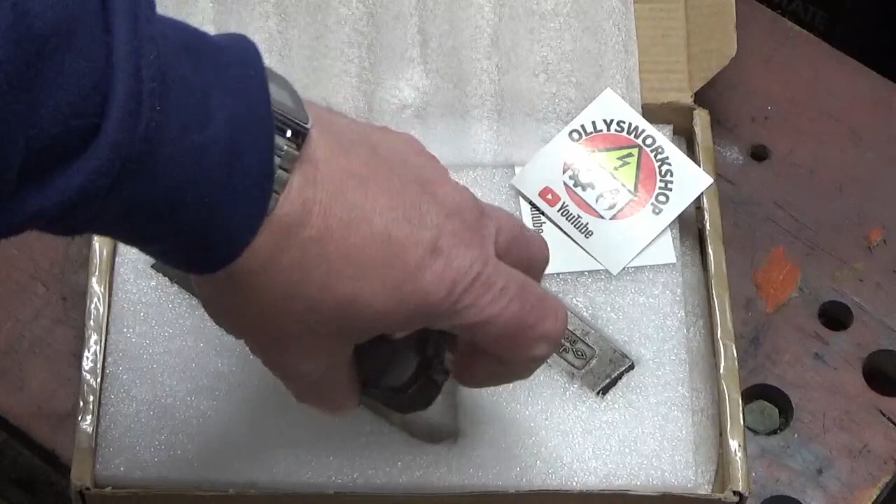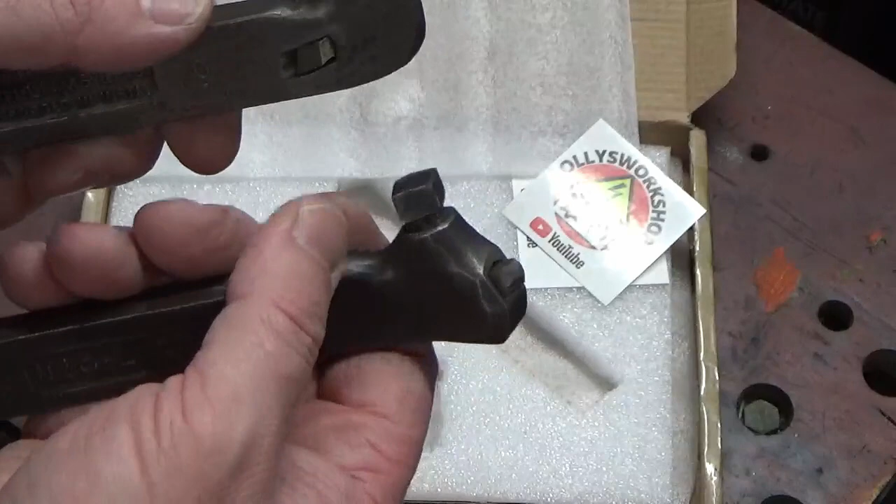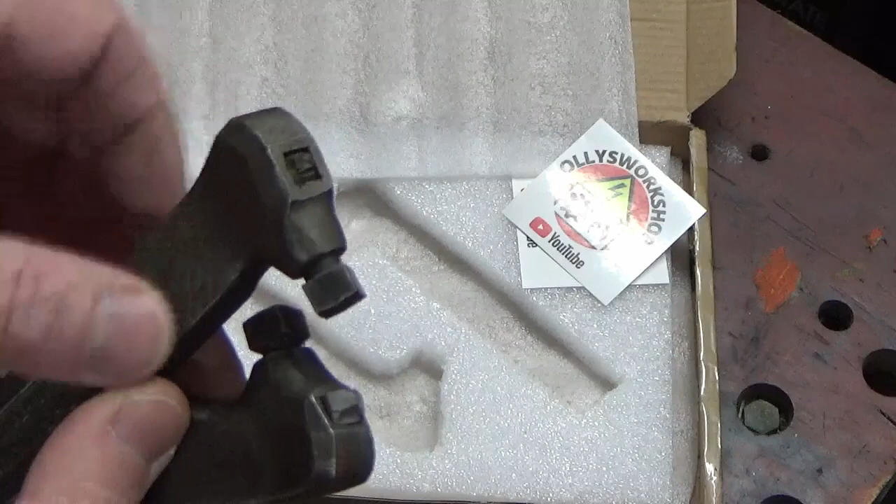Olly has sent me, based on the work that I'm doing with my shaper, he got in touch with me and said, look, I've got a couple of old turning tools, shaping tools, a left hand and a right hand, would I like them for the shaper? Because Olly said he's not going to do anything with them. So I said, well, yes please, they would be very handy. These are the kind of tools that you load a bit of high-speed steel into, and they're cranked, which is ideal for the shaper for getting into corners and things like that.

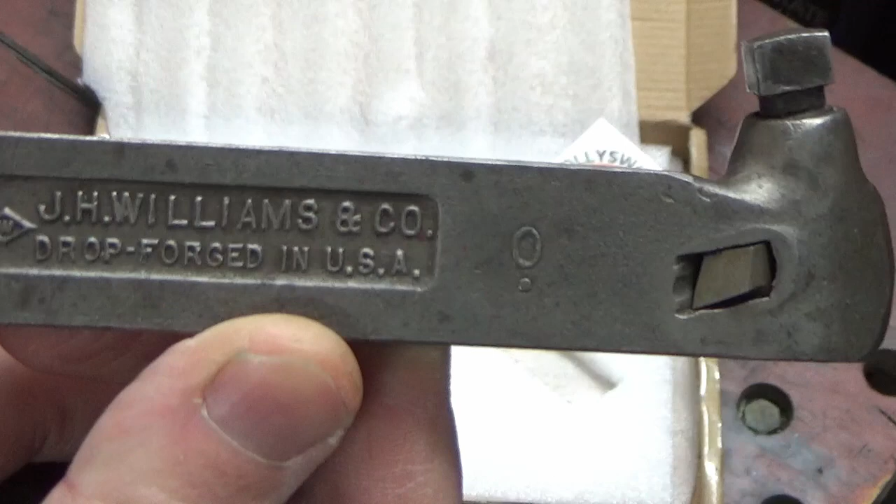So one is, oh dear, a Williams turning tool holder, J.H. Williams and Co, drop forged in the USA. And the other one is also a USA made tool, which is an Armstrong, Chicago, USA. So both good quality items.

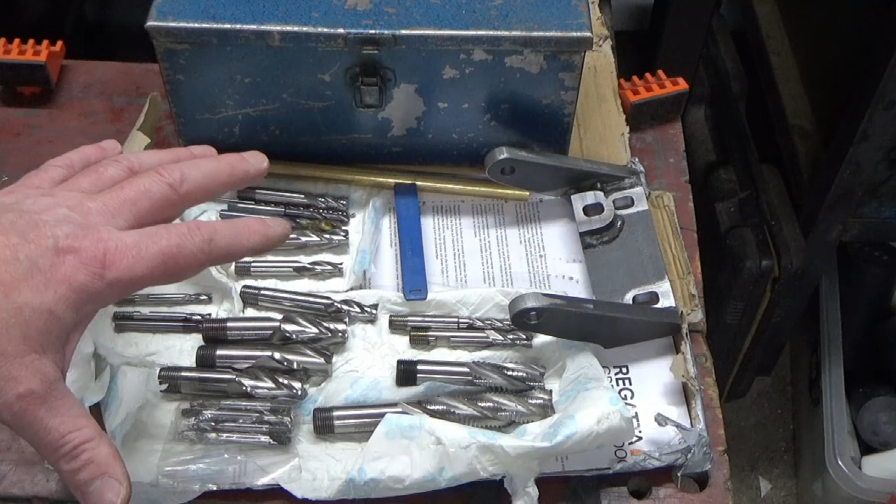There's two separate, very generous subscriber donations here to the channel, which is massively humbling, and there's some really generous people out there. So this lot at the front here is from Terry Bloomfield, one of my long-time subscribers, and I often swap mails with Terry. Doesn't live too far from me, and Terry and I have been keeping our eye on the local auction site that go in when companies go bust, and Terry's obviously got a lot more time in the week than I've got, and he's made some good scores.

This is the product of one of those scores, and he's got loads of end mills, slot drills, that kind of thing through some of the auctions. He's got some good bids and got some good scores. And he said, do you want me to send you a few? I said, yeah, you're more than welcome to, Terry. And I've only literally just unwrapped these, Terry.

I've been keeping them for this, so been through and unwrapped them. There is some absolute belters in here, and these are all the Clarkson threaded shank, which I've never really had any of those. I've got to be honest, I've always gone plain shank, because that's the kind of end mills that I've had access to. So Terry sent me all these through. There's a mixture of rippers, long series, standard series, just high speed steel, end mills, and all very good, all in very, very good condition. Couple of carbide end mills. Yeah, just fantastic, Terry. Absolutely brilliant.

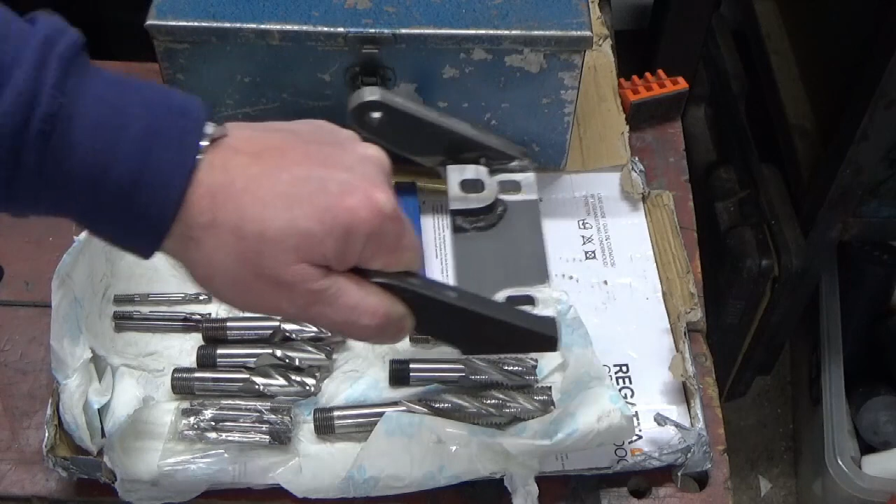And Terry also sent me the piece of 10mm plate that I made the bracket for the shaper out of, and a nice rod of brass that he chucked in as well. So Terry, thank you very much. That's much appreciated, and they will get put to good use.

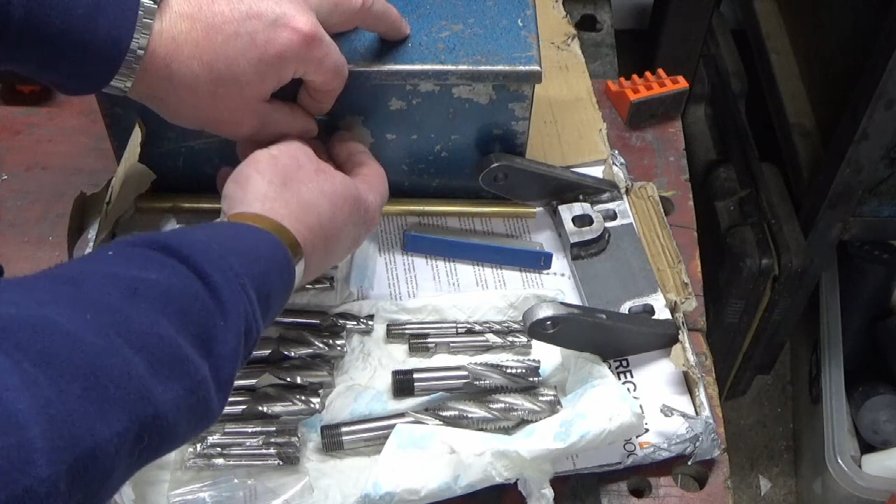Alright, so to anybody who understands the size of an Atlas 7B shaper and understands what a vise looks like, and is looking at this box, you'll probably now understand what I mean by, I think it might be just a tad on the big side.

So what I will say, I'm not going to do an unboxing, but I just want to show you this box. The guy I ordered this from on eBay said, look, it might take me a while to get this to you. I'm in the middle of moving workshops, but don't worry, stick with me. And I said, look, I'm not in any rush, so I'm fine with that.

I said, just do me one favour, can you please make sure you do a thorough job of boxing it up? It's quite an old vise in here, with quite thin sections in places, and I didn't want Captain Postman doing his usual trick of playing football with it. So I said to him, can you do a good job of boxing it up?

Well, you really cannot grumble at this. It's bolted down inside the box, and he's used three-quarter inch, 19mm, a mixture of chipboard, plywood and OSB board to make this box up. I couldn't be more pleased with the way that came packaged. Anyway, enough of that.

I'm going to get it out of the box. I'll get it on the bench and we can dig into it. It's not been out of the box yet at all, so I'm going to get it out of the box and on the bench.

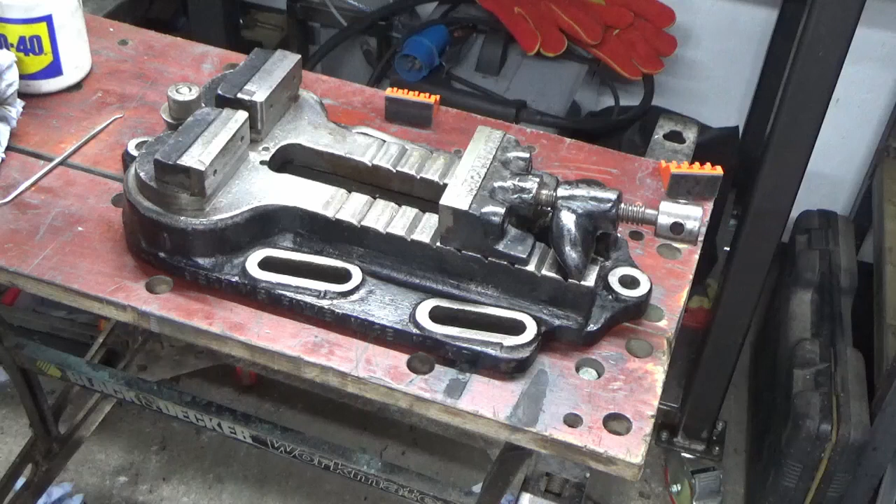So, what folly? Well, having looked at it out of the box, I think I probably should have done slightly more research. Anyhow, it's here and we bought it.

So what is it? Well, it's a Jerry's, I'll show you this in a minute, Jerry's Fixie Vise number X5. I think this is really quite old. It's got a...

Just over 6-inch, 160mm capacity at its broadest. Total width nearly 6.5 inches, 165mm that way. Overall length of the whole vise is 18 inches or 480mm from lug to lug, and overall width is 9 inches, 230mm. Overall height, which is one of the things that drew me to it, is 95mm or 3.5 inches. Now that's what I saw.

Well, amongst other things, it was that slenderness that attracted me to it, just because of the amount of room I've got on the shaper. So that was one thing that drew me to this, and the second thing is it's got these adjustable jaws where you back this off and you can wind these around and reset them to hold round stock. You slide your jaw up, slide your clamp up, and clamp up some round stock. And I thought, for a shaper, being a complete shaper newbie as I am, I thought that would be a really useful thing to have.

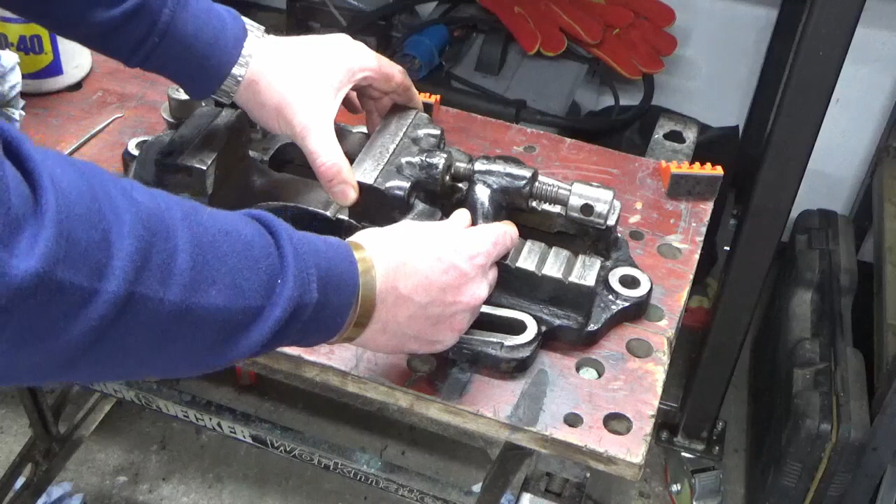The other thing I found that I'm not best pleased about, because the guy never mentioned it, as I was playing around with this - it's fairly obvious that the tip of the thread, the cone on the end, doesn't line up with the conical shape in the end of the jaw. When I looked at that, it's fairly obvious it's been cracked there and there, and the crack runs around here. It's been repaired. Somebody's re-drilled a very poor conical shape into the back of the jaw, and it's in the wrong position by the looks of it, albeit it looks fairly centered.

So yeah, you can see the crack. I don't know how it's been repaired, really don't know. So yeah, not best pleased about that - the guy never mentioned that at all in the sales pitch on eBay. Not the end of the world though. I'm sure we can do something with it, and we need to strip this whole thing down anyway to have a look at it. So, folly or not, I don't really know, if I'm honest, at this point.

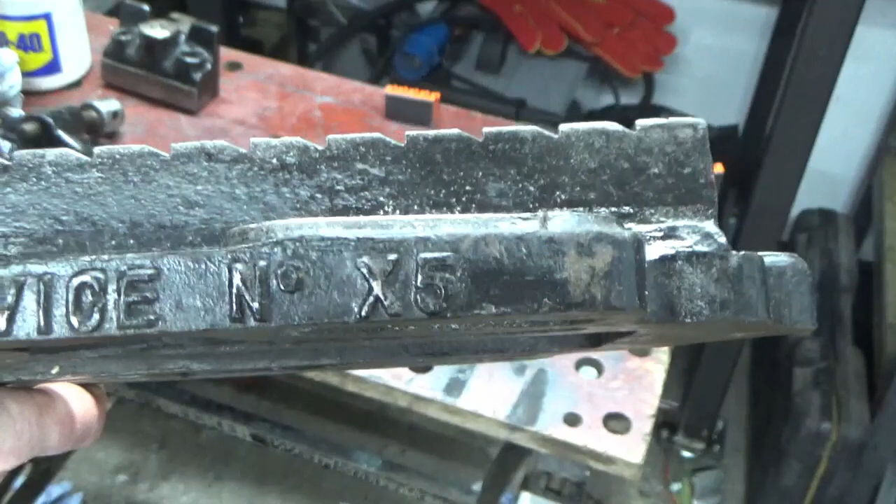I'll just lift it up. So there you go, Jerry's Fixie Vise number X5. And then on the underside you've got the mechanism

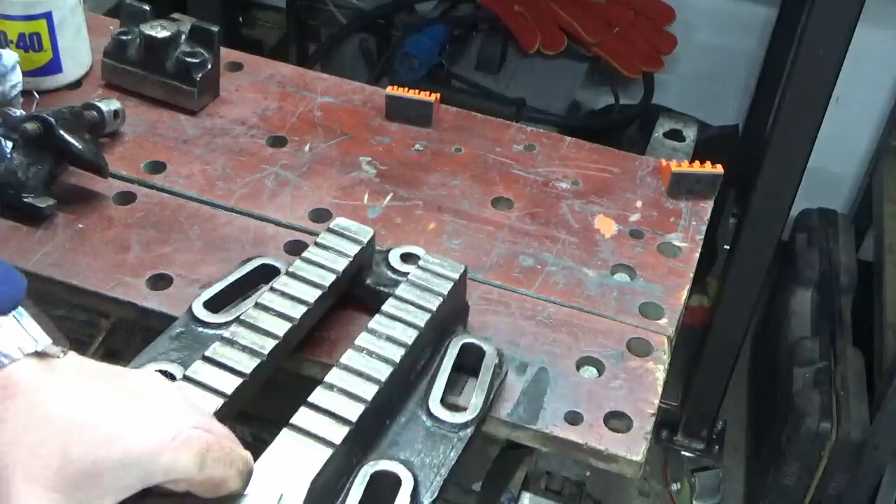for these moving jaws. This is a milling vise from the research I've done. In all my years of working on old manual milling machines, I'd never seen anything like this. I'd never come across anything like it, and I think that little bit of novelty factor drew me. I've obviously seen this affair before, but I've never seen this kind of swivelling jaw affair mixed with this, mixed with a slim height.

There were just lots of things about this that appealed to me. So anyway, on all 3 jaws it looks like it's got hard-faced jaws with serrations, which again, for the shaper, for most work is probably okay, albeit probably would need a set of soft jaws as well.

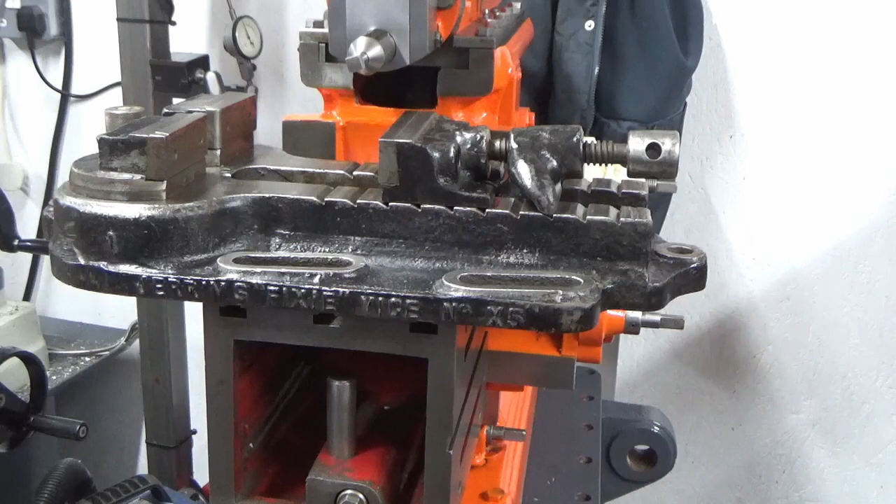Okay, now you're not to laugh. I think I've overstepped it, if I'm being totally honest, which is a real shame. I came out and had a quick squint at the table and thought, I reckon I could just about make that fit.

And these are kind of angled slots here, and at the very inner point on both sides I can just get into the T-slot on the table. Height wise it's very good, but obviously there's a couple of inches, or maybe an inch and a half, unsupported at this end. I could move it back to the next set of T-slots, potentially to the very end set of T-slots.

Do you know what, that could potentially work? Yeah, I don't know. It's right on the limit - absolutely right on the limit of being just too big.

Weight wise I think it's fine because it is not that heavy, even though it looks big. It's not that heavy a lump, but look at the capacity that would give on the shaper - that's what I'd seen when I looked at this, and I just liked it. There was something about this that just drew me in, and here it is. So worst case scenario, with a bit of fettling, this will absolutely do as a second vise for the milling machine, and it will be fine on the mill.

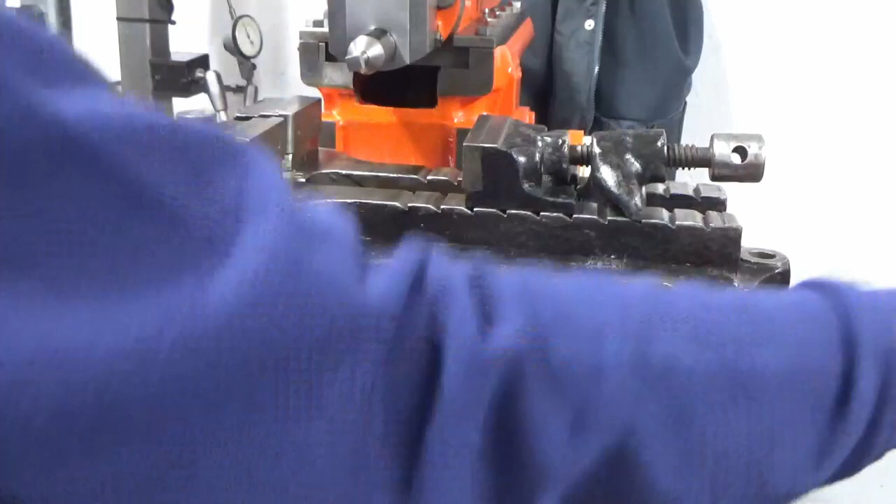The overall length is not an issue because you're in clearance on both sides, so the fact it's that long doesn't really give a problem. Most of the clamping space there is right over the table surface, and it's got this V idea, which again on the shaper would be very useful for gripping round stock, for putting keyways in and things like that.

Okay, so this is the job for one of my viewers. This is Martin, and I've checked with Martin, he's happy for me to show all these details. So Martin is a newcomer to the hobby.

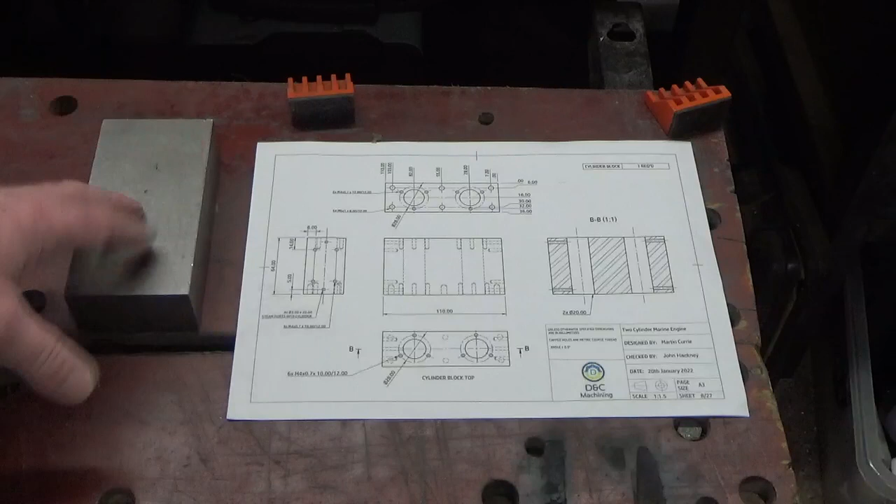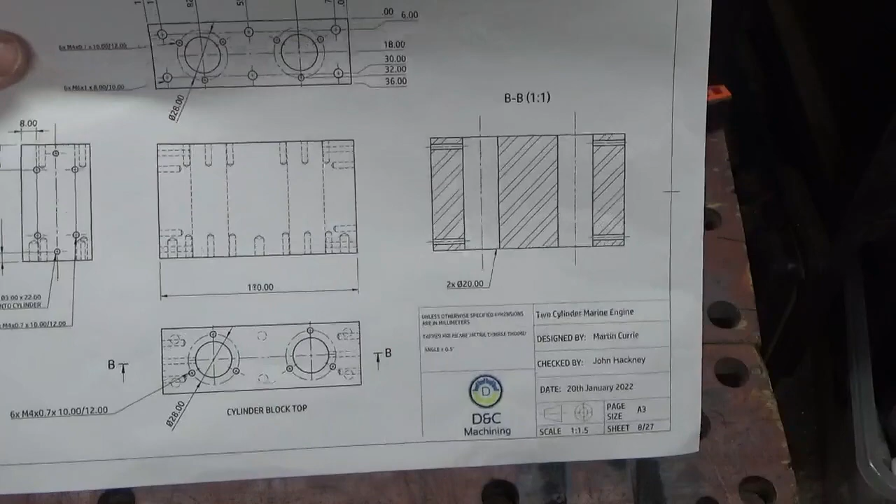He's recently set himself up a workshop and he's just getting into making things, but he's also learning engineering in a lot more detail than just machining. So he's been teaching himself CAD, he's also been teaching himself design, and he's taken a known design of a steam engine, and he has scaled it up to be, I think, twice scale, and this is his CAD work.

He's been struggling with getting the cylinder - so this is the cylinder block, a twin cylinder steam engine. Martin's asked me would I make him the cylinder block, because he's had some difficulty getting positional accuracy and things like that on his mill.

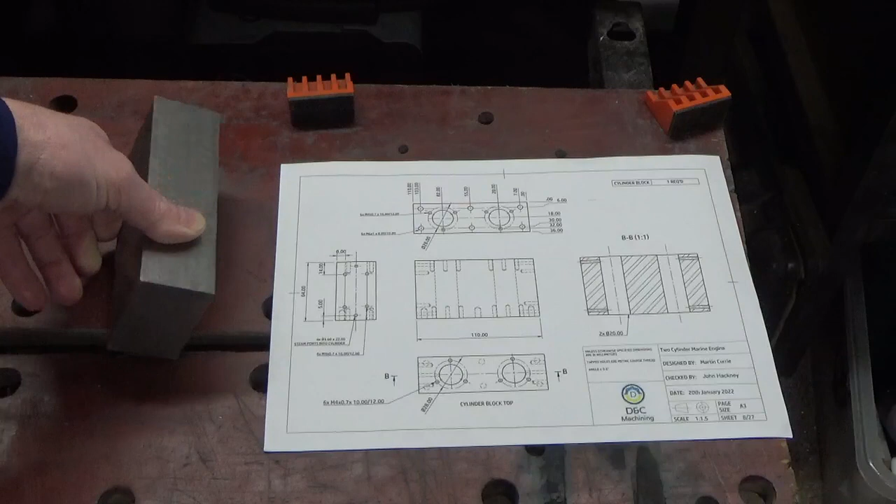As I say, he's only just starting out in the hobby, so he's in a bit of a learning mode. He's making the rest of the engine himself. He's shared the plans, I think it's on Model Engineering Forum. When I upload this video, I'll double check and put some details in the description of Martin and the engine's name itself and where he shared it, in case anybody else is interested.

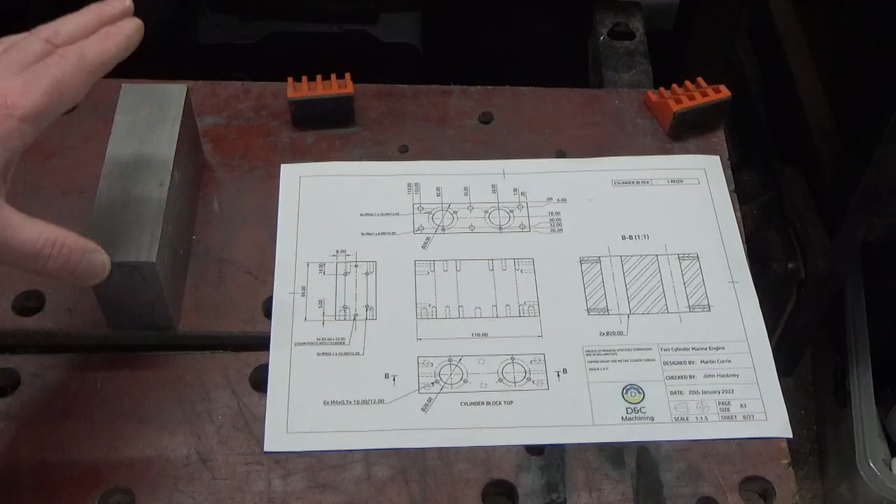He's scaled all this thing up and he's making a double scale version of it, and he's asked me would I be kind enough to make the cylinder block for him. So he sent me a decent slug of material and a few copies of the drawing, because I'm liable to damage one or two as we go through.

So that's one of the upcoming jobs on the new mill once I've got the spindle issues that I've got at the moment fully resolved. That's one I'm quite looking forward to, making something to print for somebody else, something I've spent most of my career doing. So it's going to be nice to get into doing something like that. Look out for that one coming up.

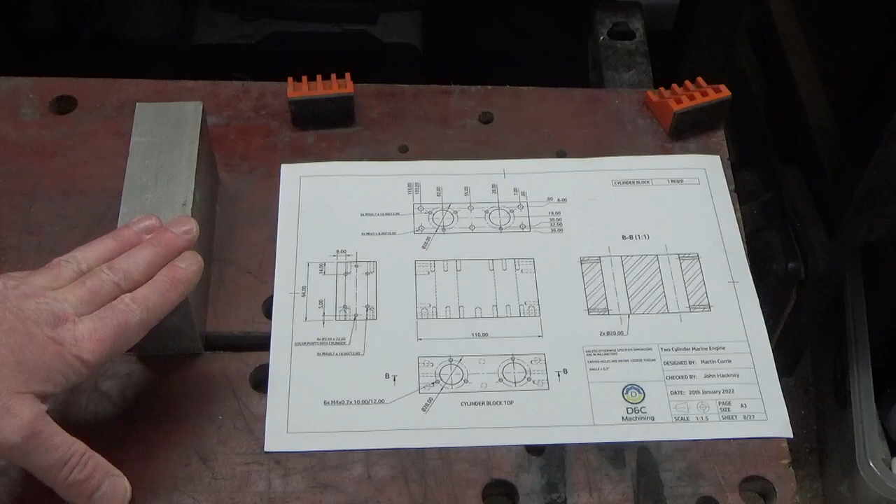And in terms of other jobs coming up over the next few weeks, more shaper - I want to get the shaper finished off. More mill refurb - I want to get that finished off and get the spindle back up and running properly with the quill working. So yeah, there's a bit more work to do on both of those things.

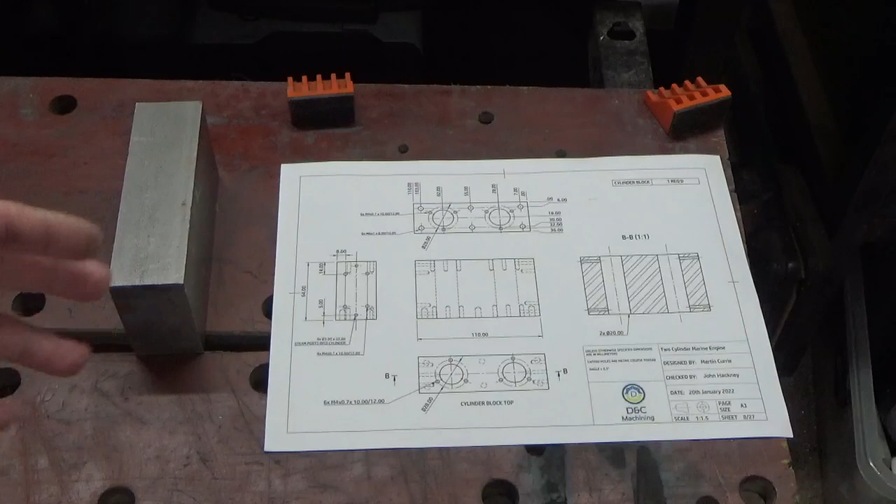And there's various things that I want to do and get started project wise. I've not planned anything in yet other than what you're seeing on the bench in front of you and the mill and shaper refurb, but there will bound to be other things that crop up as we go through the next few weeks.

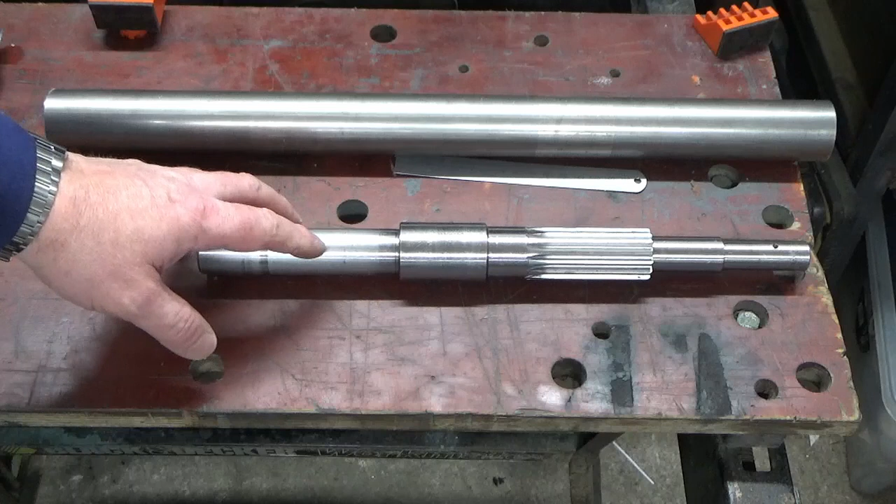So, quick update on the milling machine saga. Those of you that are following along will have watched me make a right pig's ear of trying to recut this pinion shaft for the quill.

In that video and in the subsequent planning video, I spoke about remaking this whole shaft, which was kind of my plan at that point. I've ordered some material, so we've got some EN32T material here, which is more than long enough to make one of these and have a chucking piece or some spare.

Some of the comments I got on that video were about stuff that, in the heat of the moment after it had just happened, I hadn't really given proper thought. A couple of comments, one from Dave Ticehurst and another from somebody else - apologies, I forget so many comments on that video - suggested why don't you turn the teeth off and sleeve it, so put a sleeve on, pin it through, and then recut the gears into the sleeve.

It's not under a massive amount of circumferential load, so I thought, yes, that's a really good idea. If you look at the length of these two bits of material, the original and the new, I've got more than enough, if I chop this end off, to make a sleeve that will cover this area here. And if that doesn't work, there's still enough material left in this bar to make an entire new shaft. So that's plan A and plan B in a nutshell.